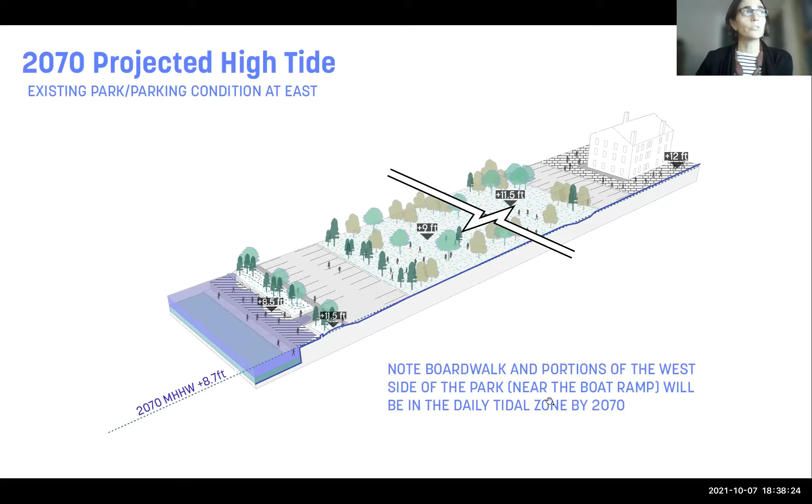In the future, with predicted sea level rise, we've looked at several models and have a consultant on our team, VHB, who's been helping us understand the best models for sea level rise to use. The future predicted high tide, again happening twice daily, in 2070 is at 8.7 feet. You can see that will inundate the boardwalk itself and portions of the access to the boardwalk on the east side. Not shown here, on the west side of the park near the boat ramp, there are areas of the actual landmass that would also be in that daily tidal zone by 2070. You can see in this map that same condition on the existing site, showing that by 2070 there would be some areas of flooding on the west side of the park.

Certainly all of the areas right along the shoreline at the boardwalk would be in the tidal zone, with more areas in the tidal zone by 2080, 2090, and 2100.

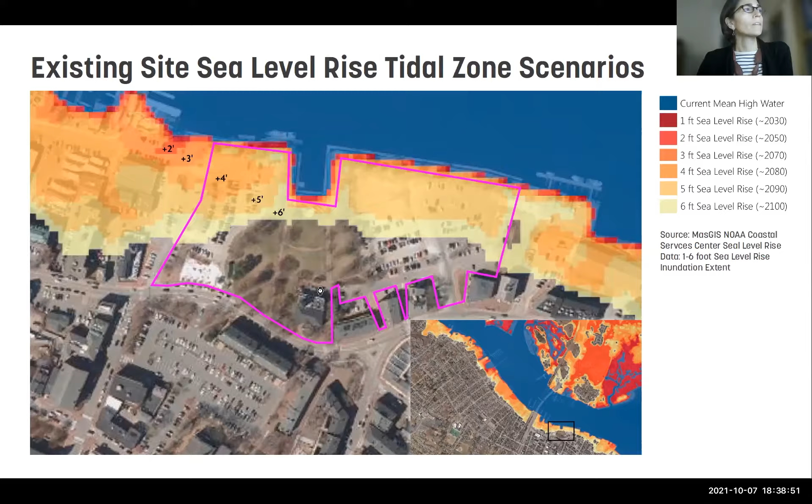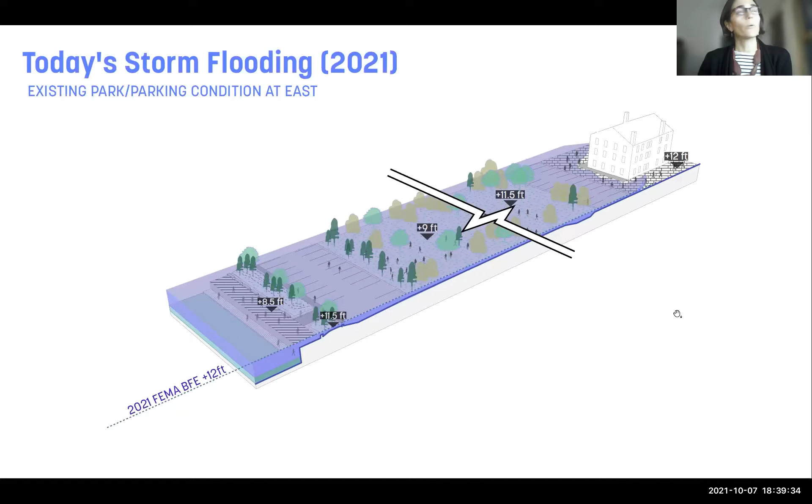The second piece of the picture when it comes to sea level rise and living in a coastal community is storms. This is showing the flooding extent for the 100-year storm, meaning there's a 1% chance of that storm happening every year. You can see that elevation set by FEMA for flooding is at 12 feet. So already today on the east side of the park area, you have flooding on the order of 4 feet or so at the lower elevations, extending back towards the street at lower depths of flooding.

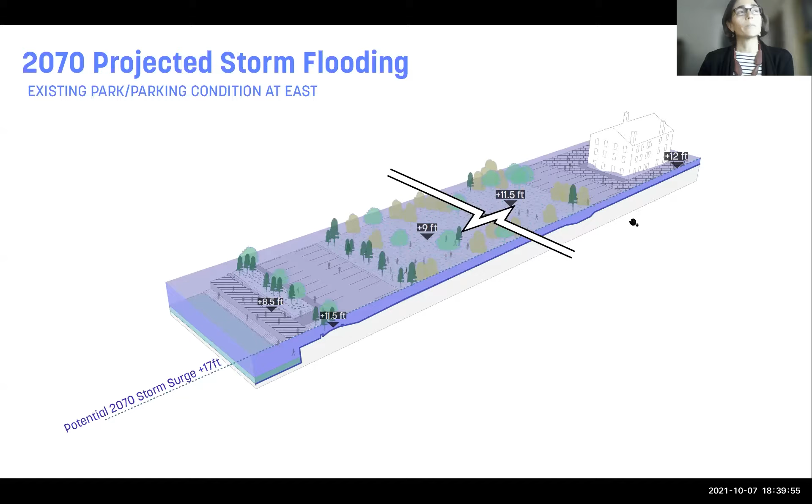The condition as you go towards 2070 with sea level rise, that projected storm surge gets up to about 17 feet, which puts that whole land mass under more like 5 and above levels of flooding. So quite a bit of flooding already predicted to happen on the site.

This map here puts that into context on the existing site. What it's mapping is in 2070, during the 100-year storm, the depth of water expected across this site. You can see it's quite deep closer to the lower parts of the site, which are currently the boardwalk, and closer down to the water's edge, up to about 10 feet of water. That inundation comes all the way in, past the street in some places.

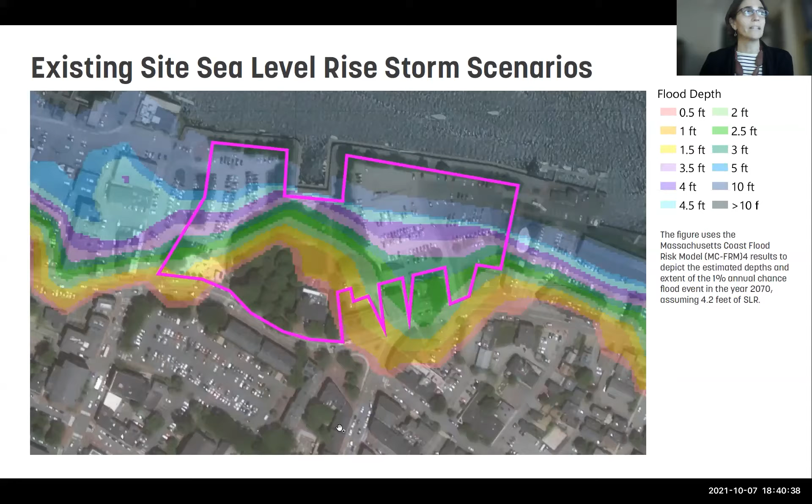These are models that are already available, widely circulated, and definitely trusted when it comes to coastal resilience planning throughout Massachusetts and beyond. What we've done is applied those to the design of the site. So this again is that site design. What we're going to do now is walk you through a series of diagrams showing, if nothing else is done and the park itself is the only thing implemented from a design perspective, how that same kind of tidal inundation and flooding from storms would affect the park itself. Then we can talk about future improvements as well.

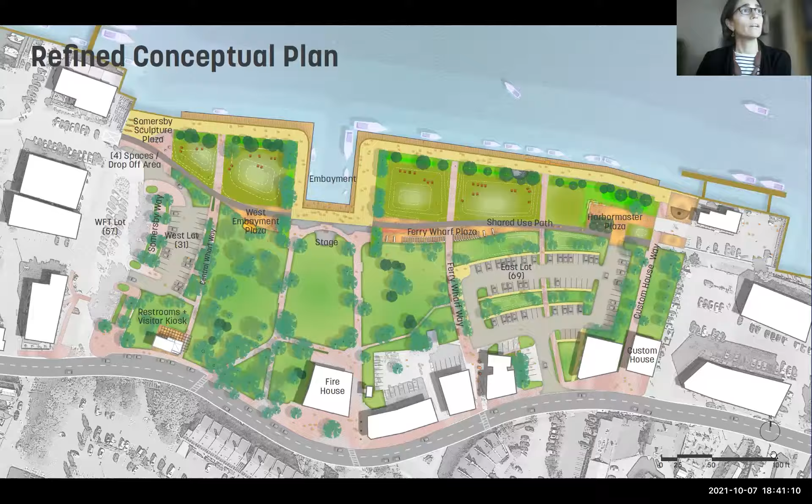So what this diagram is showing is the park design with the designed grading plan, which has a couple of limits. It does have to tie into existing site conditions at the existing Market Landing Park, as well as all along the boardwalk condition and at the edges of the site. So there are some limits in terms of how much we can raise the grade of the site because of the surrounding conditions we're stitching to.

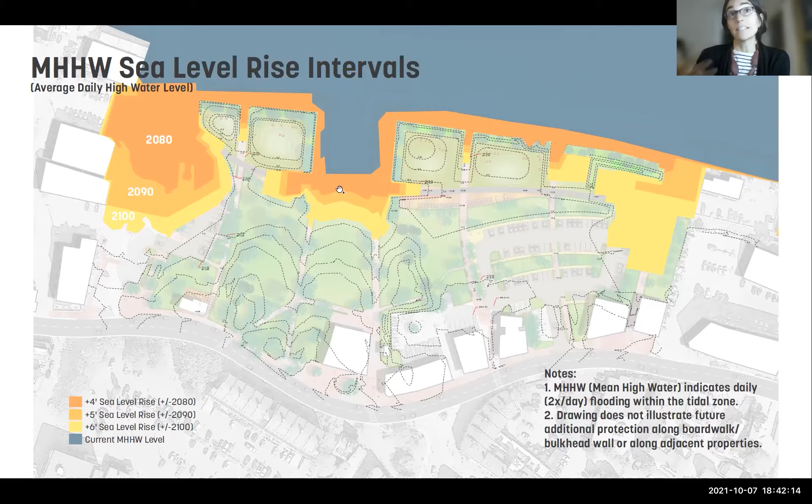What this is showing is the average daily high water level. Twice daily there's a high tide. This is showing that average high tide in 2080, 2090, and 2100. You can see that there is some flooding of the site that starts to occur between 2070 and 2080 because of sea level rise. Again, this is twice daily flooding that is expected if no other measures are taken, if you only implement the park design and nothing else. These are the areas that you could expect to start seeing daily wetting, they're essentially in the tidal zone, so they're getting wet twice a day.

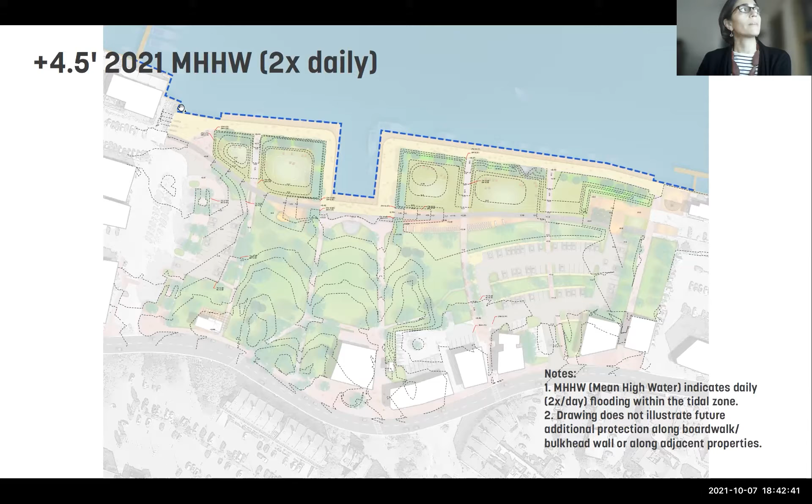And what this does is back off of that and explain a little bit about what time horizons you can start to expect things to get wet, which I think is a useful way to think about it. So this is showing today's daily high tide, twice daily, water gets to that elevation of 4.5 feet. And currently that's really held back. There's a little bit of where it comes in at the boat ramp, but otherwise it's held at the edge of that bulkhead wall.

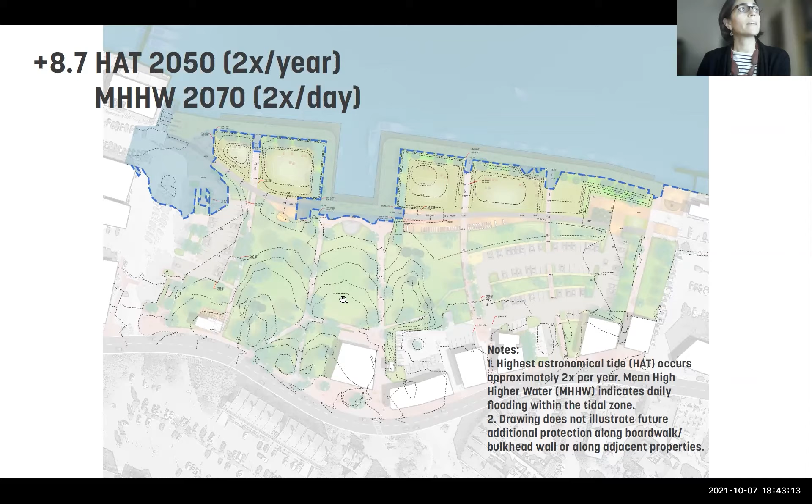In 2050, the highest astronomical tide, HAT, which occurs about twice a year, would bring water to this contour, 8.7. And then also by 2070, that same area is getting wet twice daily as part of the average high tide. Again, this drawing doesn't illustrate any additional improvements except changes to the park and the grading of the park.

By 2070, twice a year, the highest astronomical tide is going to bring tidal floodwaters into a greater extent of the park, and you can see the ways in which that's happening. Again, no other changes are happening here in this scenario to the boardwalk or to the areas in which the park really has to stitch into that existing condition.

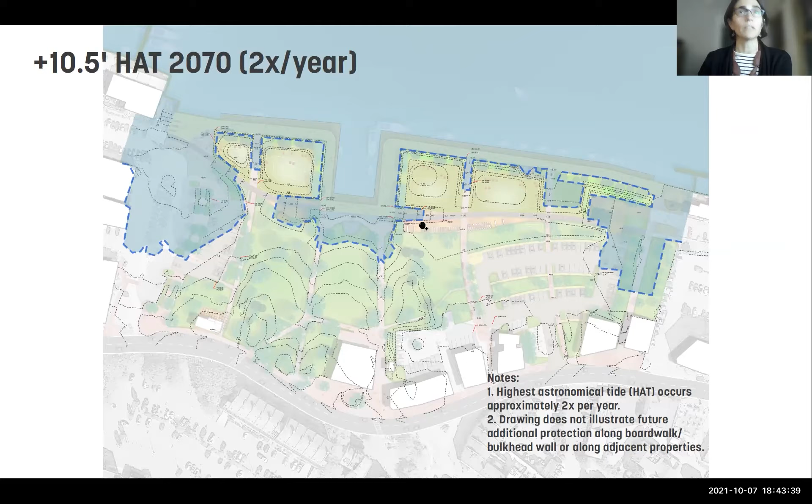And then finally, we just wanted to map that 1% chance every year of a 100-year storm. So those base flood elevations are set at... this number is wrong, excuse me for that. So that FEMA base flood elevation at elevation 17 in 2070 would be inundating a really significant portion of the site. But again, that's the 100-year storm, so 1% chance every year of that happening.

And this is again illustrating the amount of flooding if no other protective measures happen in adjacent properties or along the water's edge.

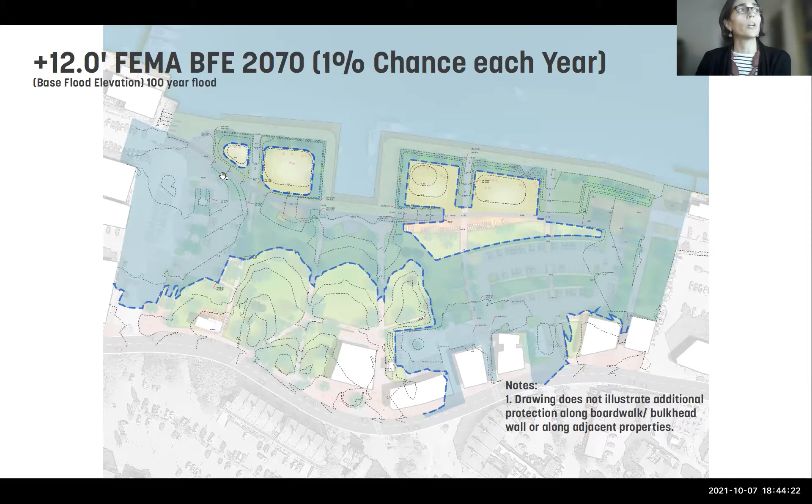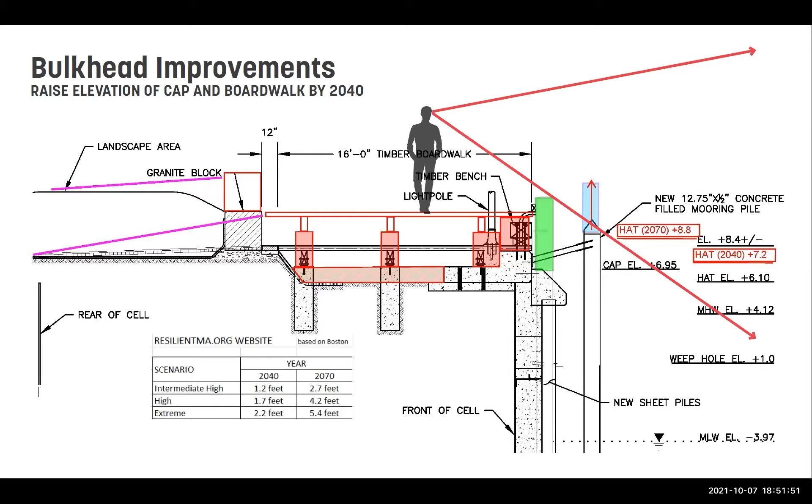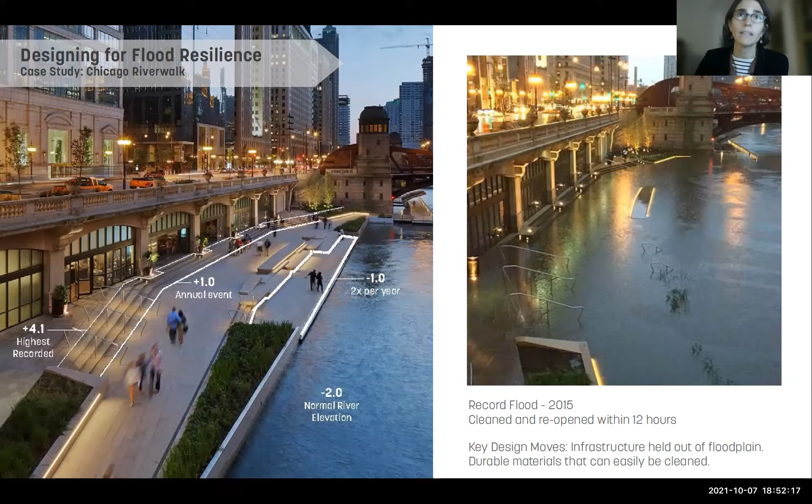Last but not least, we wanted to acknowledge that especially during a storm scenario, we showed some pretty significant inundation of the park itself. Remember, that storm scenario is really a 1% chance every year, so roughly 1 in 100 years that could occur. But we're pretty familiar with planning parks to be occasionally inundated, and there are some tried and true methods to ensure a park can get wet and be resilient to that flood condition, emerging in the same condition it went into the flood.

We have two examples here. The Chicago Riverwalk, a Sasaki project that transformed Chicago's relationship with the river, was designed to flood. The Chicago River floods about twice a year, and all the areas along the Riverwalk are designed to meet that inundation and handle it. It keeps infrastructure out of the floodplain and uses durable materials that can easily be cleaned. These pictures show a record flood in 2015, and the whole park was cleaned and reopened within about 12 hours. It's a pretty simple operation when you plan well for it, and the park can be resilient to it.

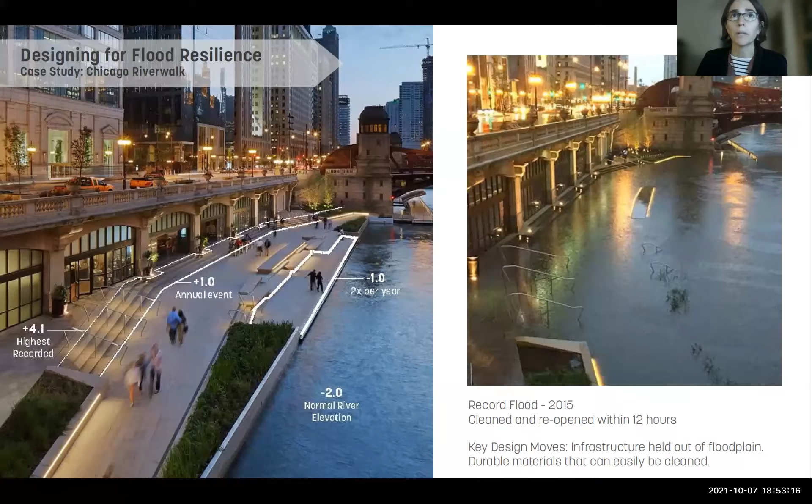The second park we wanted to note, also designed to flood, is Cincinnati's Smale Riverfront Park. The nice thing about this, in the context of Market Landing Park, is that it's a much softer park than Chicago, so the balance of green areas to paved areas and program space is similar in lots of ways. This park was also designed to flood. This is the record flood, a 100-year storm that flooded the Ohio River. The park was inundated for several days, which is unlikely to ever happen at Market Landing Park, where flood scenarios are more like a couple of hours of high tide, maybe enduring a couple of high tide cycles in a big storm. But this park was underwater for several days.

There were significant measures taken in the design process to ensure that infrastructure was out of the floodplain, the materials were durable, and in some cases barriers were installed on the upriver side to prevent any flotsam from taking out structures. When the Ohio River floods, all kinds of things like old refrigerators and cars come floating down the river. That isn't the case in Newburyport, but we want to acknowledge that parks can be designed to withstand this kind of flooding.

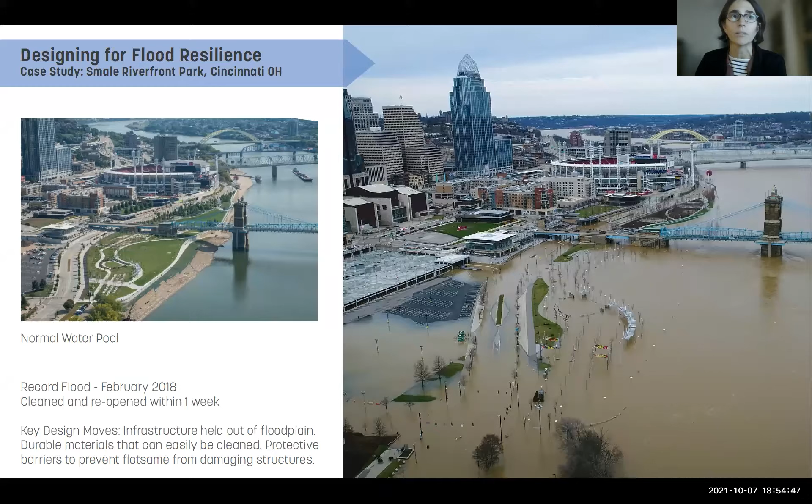There are specific considerations we can make to ensure that Market Landing Park can be resilient when floodwaters inundate the park in the future.

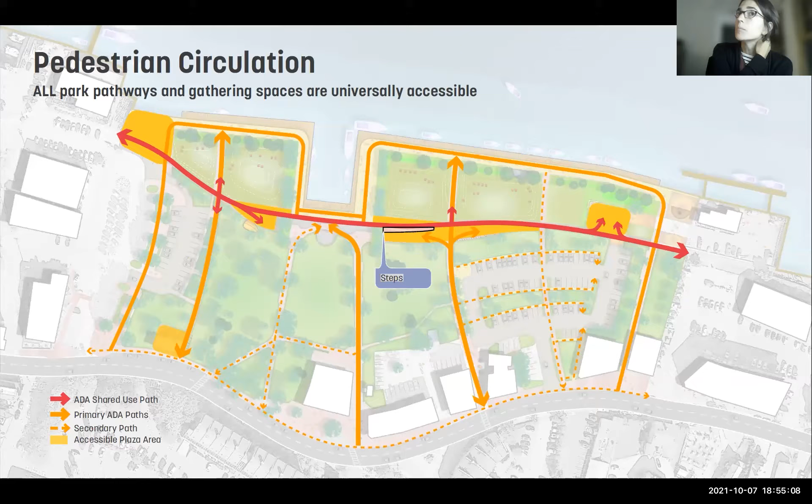We have a couple of diagrams here also to answer questions about service and commercial fishing and ADA access that came up at our last meeting, so we want to make sure we're all on the same page with understanding some of these key moves made in the design and planning of the park.

There were several questions last time about ADA access and ensuring the park could be universally accessible. We want to be clear that's a core tenet of our design, to ensure all park pathways and gathering spaces are universally accessible. Whether you're using a wheelchair, pushing a stroller, or riding a bike, you can get there the same way as any able-bodied person on feet.

All of the bold lines here, as well as all of the dashed lines, show universally accessible pathways. These are pathways that are either flat or sloped at a level that doesn't even require ramps or railings, so these are just universally accessible ways to arrive at the park.

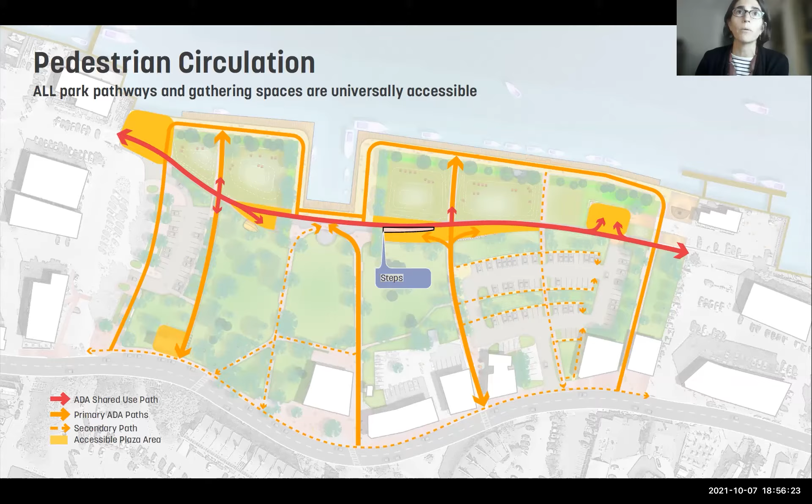You can see that all of the gathering spaces, shown in yellow, are accessible by those pathways. There is one area with steps in order to retain some of the grade as the shared use path drops down to meet the existing grade at the boardwalk, but both the upper and lower levels would be accessible, so there could be companion seating and opportunities to enjoy both experiences, no matter your level of mobility.

The second thing we wanted to note here was the everyday vehicular circulation. You can see those two access points from the street and the ways in which cars can move fluidly around to find parking spaces and then move back out of the site, and the ways those would be accessed by those pathways we just showed you.

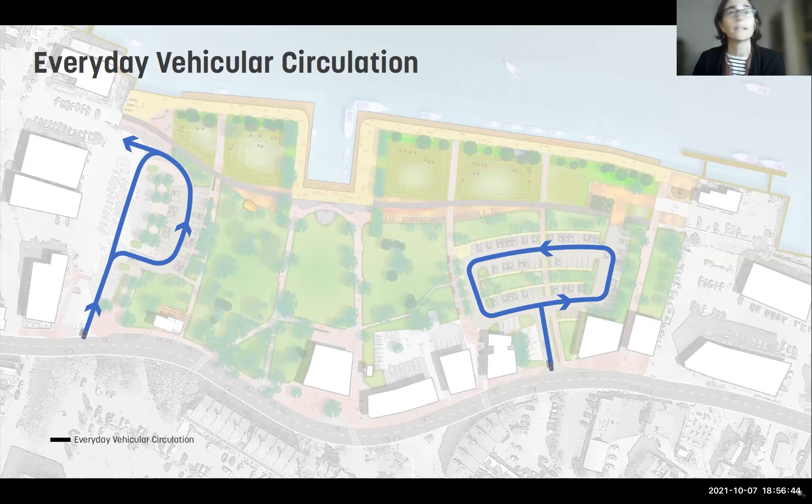There were several questions last time about circulation and access specifically for the Harbor Master facility. We understand there's a fuel truck, one of the largest vehicles that comes in regularly, and this pathway shows the outer extents. The bold lines are the outer extents of a fuel truck that would be able to turn and drive through there, so we're studying the way in which that wheel pathway, as well as the outer extents of the truck, could be accommodated along a paved route for that turnaround and backing into the Harbor Master facility. Smaller trucks could use the same access route and make those turns even more efficiently.

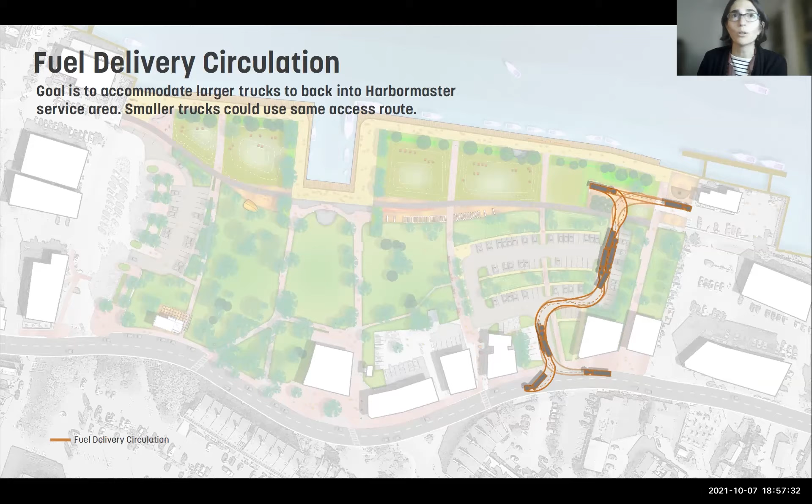We also wanted to note that fire truck circulation has been well coordinated with the fire chief. What we're providing here is a route for fire trucks to get to the embayment where they need to be in order to fight fires that may occur on any boats at the dock.

We've provided that access via the shared use path as well as routes through the parking area. The solid outer line depicts the outermost edges of a vehicle as it's maneuvering through that space, and you can see we're making every effort to ensure that outer vehicle movement remains on a paved area, which can accommodate it and be resilient to that vehicular load over the long term.

It's also worth noting that the embayment is used as the winter area for certain commercial boating activities. So for specific loading and unloading of that use, we could also imagine that specific parking and loading access could occur on these same vehicular routes that the fire truck is using.

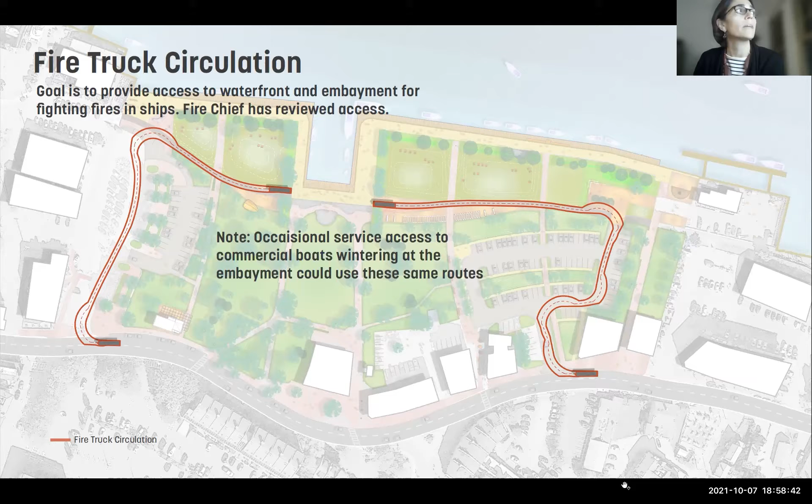There were a few questions last time, as well as in the comments, about the width of that shared use path and how it functions specifically for vehicular access and fire truck and emergency access. So here we're noting on that same rendering you saw last time that there's a 10-foot wide paved width, which is appropriate for a fire truck as well as everyday use of the shared use pathway. Then there's a 2-foot shoulder.

In some cases, that shoulder would be paved and rated for vehicular loading, and in some cases, that shoulder is reinforced turf. So again, it provides the resilience to the occasional loading of a fire truck and other wheeled vehicles, but it also can appear grassy and feel soft and park-like on a daily basis.

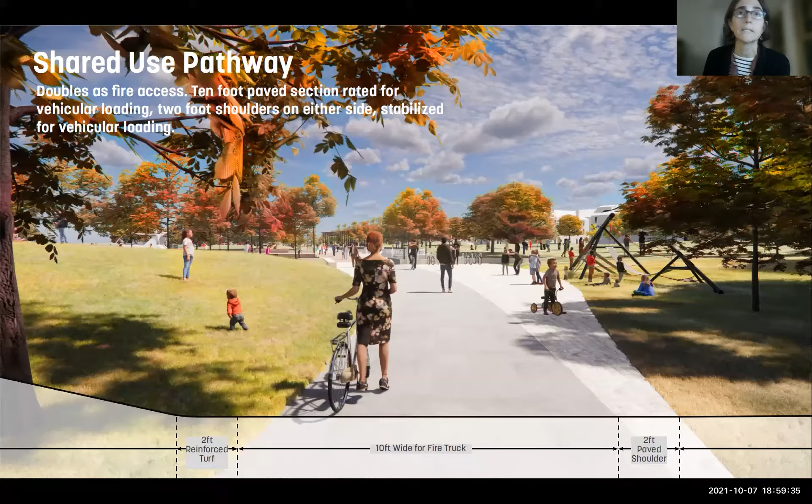Finally, we wanted to note that there were a few additional topics. So those were the two big ones we heard from you all about, as well as saw in some of the comments that came through, but there were some additional topics. We just wanted to make sure that we all had understood and addressed all of the comments that had come through about the plan.

We received 24 specific comments through the online portal in response to the refined plan. I think it's worth noting that at this point in the process, it's typical to see people who are very passionate on one side or the other respond, while most of the public who had been active earlier start to fall away. So again, about 50% of those comments are positive, cheering on the design, or neutral, and about 50% are specifically focused on a couple of questions or critiques about elements of the design.

There were four themes that came out, especially in some of those comments critiquing the design, that we want to be sure we really address. In the top left here, there were a number of comments about additional bike racks. We wanted to note that these can absolutely be accommodated within the design of the park, and we'll continue to study the best locations and numbers of those as we get into the construction document phase. Thank you for those comments.

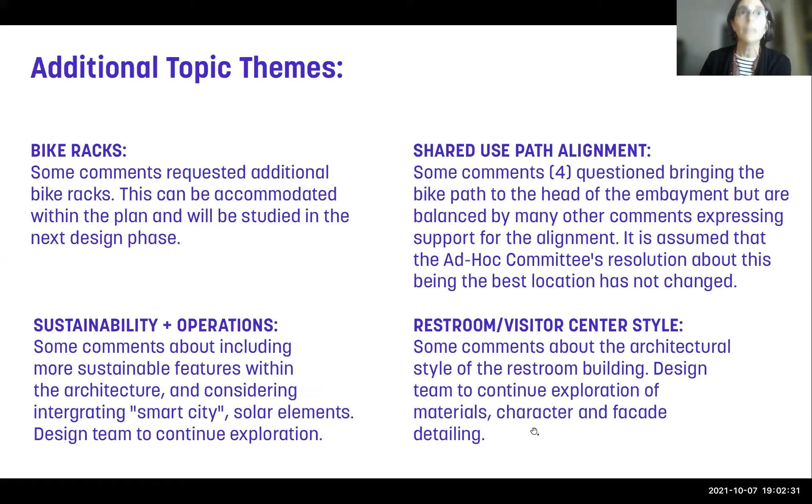Finally, there were a number of comments about sustainability and operations, and also some comments about the restroom and visitor center style. We will continue to address those and explore different options during the design development and construction documents phase, and feel confident that we can hear the comments and incorporate those into the design.

Finally, there was one additional question raised at the last meeting about additional maintenance costs, which could be expected related to the acquisition and operation of a new park within the Newburyport Park system. So we're offering three ways to think about this. The first, on the left, is local precedent.

The Waterfront Trust has reported a range of operating costs over the last bunch of years, everything from about $30,000 a year to about $85,000 a year. The area of the existing waterfront park and the new expansion of that are roughly the same, so one can imagine that the costs would be pretty similar to what the Waterfront Trust is already paying.

Another way to look at this is that Sasaki works with park systems all over the country, and we occasionally work with operations and management consultants. So we've borrowed a few numbers of typical park maintenance costs from other projects and applied those here.

You can see we have a park maintenance cost for lawn per acre, for hardscape per acre, and for ornamental planting beds. These are the primary features of the new park in Newburyport. When we apply those numbers to the quantities of different landscape types in the park design as it currently stands, we get about $30,000 a year in maintenance costs. That's at the low end of what the Waterfront Trust is reporting paying, but certainly something to consider as part of your operational budgets moving forward.

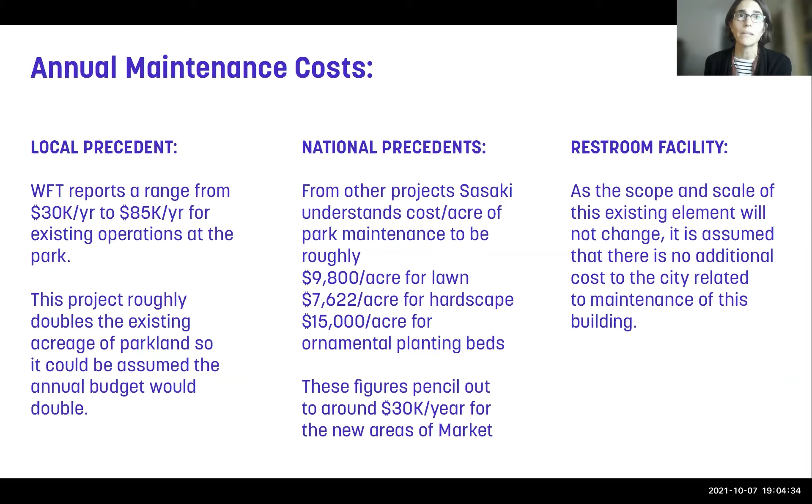The Waterfront Trust has confirmed that they support the plan. There are a few comments they had added. The Harbor Commission, same thing. When I spoke to Paul Hogg, the harbor master, he indicated that they do want to take a look at the dimensions where the crane is, but they're very confident that's just a minor question of making sure the exact dimensions are right. But they have every confidence in the project as it's been designed, and they don't have issues with access, if you will.

With that, I think what we're hoping for is that the committee here can confirm that Sasaki has done a good job on the schematic design that we've all been looking to bring together, so that they can then go ahead and do detailed design plans suitable for construction.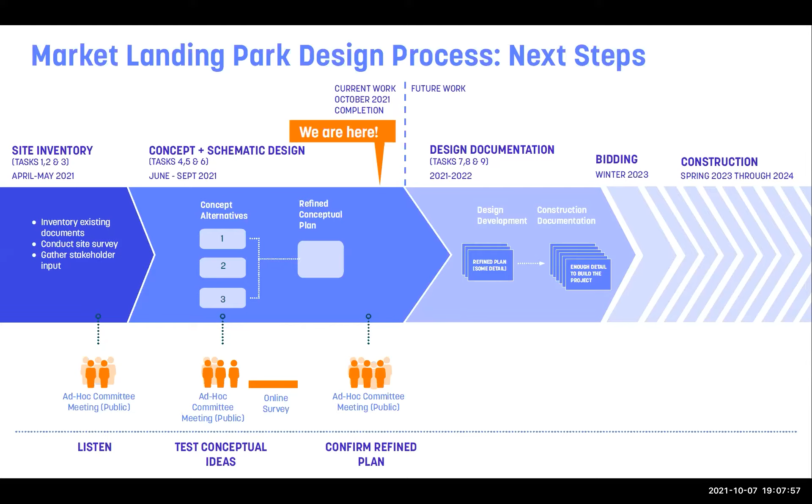Yes, thank you. I see the mayor has joined us. Mayor, did you want to say something? We're going to bring it back after public comment. Thank you, I appreciate that. I apologize, I had a different time for this meeting on my calendar, so I apologize for jumping in late.

A couple things. In terms of where the dumpster is now for Sea Level Restaurant, that was a concern raised by the restaurant owner, and obviously that's a really important function for the restaurant. I've also had numerous concerns about trucks coming down, if you're facing Sea Level on the right there, which would be Ferry Wharf. It's not marked. Next to the firehouse, that path there, that is where oftentimes cars will come in inappropriately.

Or they've been having deliveries come in and taking out the street signal there. So I would ask that there would be a way for deliveries, if possible, to come in by the dumpster. There's a brick path there now. Could that be opened up so that it could be a way for them to get deliveries in, as opposed to the system they're using now? I just think it makes a lot more sense to direct truck traffic, and for settings for this firehouse stage, they could all come in versus by the dumpster, that dirt lot. I just would like you to think about that.

Mayor, if I could, we actually discussed this earlier today, and there's agreement that we can adjust the trail there to provide better access to the dumpster location, which is being maintained. There are some mature trees there and a bit of a grading change that might preclude us making a full width path, like elsewhere in the park. So what we're trying to do is make sure they still have the access they do to the dumpster area, possibly more convenient than they do today. It wasn't entirely clear that we'd be able to get vehicles through there, which I think was one of the questions to the building, but rather we can.

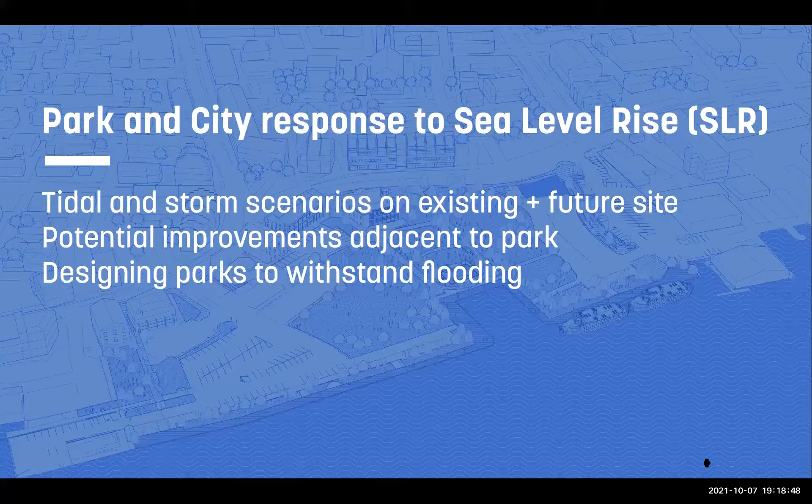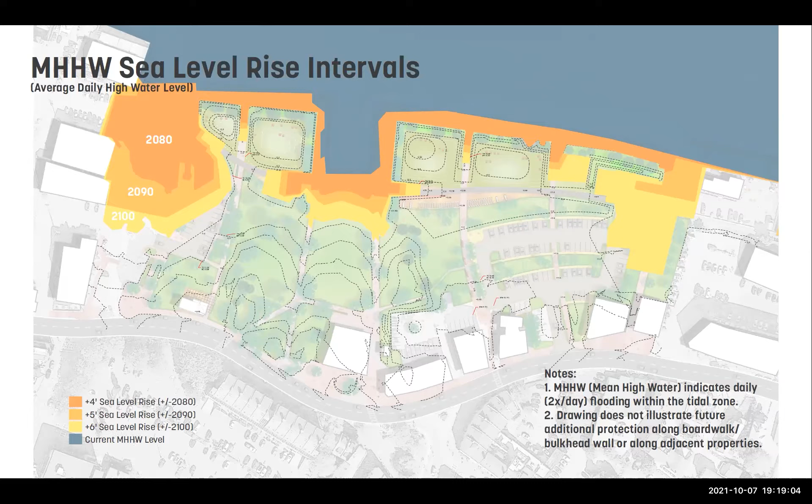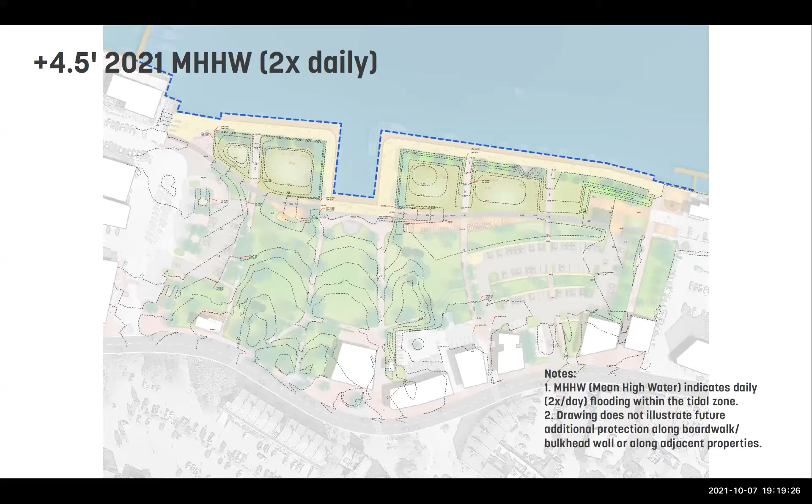The proposed cap that's there now is your standard proposed cap for the fiberglass sheet pile. Raising that to the top of the timber bench, where that silhouette person is sitting, provides a lot of benefit. It's just a little different design than the rectangular concrete filler material that Andy had shown, which came from the engineer.

So all I'm saying is that another option the engineer has is raising that cap about 2.5 feet, so the top of the cap is where the top of the seat is, the top of the timber bench. To resolve that, in my opinion, is quite easy. We can put up a new pipe rail so they can still sit on that; their feet will extend a little further. That's okay. Maybe we put a pipe rail on the cap.

Those are things that I want the Waterfront Trust to not deter from the practicality of — we need to move forward as much as we can on resiliency now, because we're going to spend a lot of money citywide on resiliency. Not doing this because of someone not being able to sit is, in my opinion, not the way to go. I'm not saying the Waterfront Trust is saying that's the way to go, but I'd like to take that completely off the table because there are ways around that. I just want to throw that out there. I think that's very important.

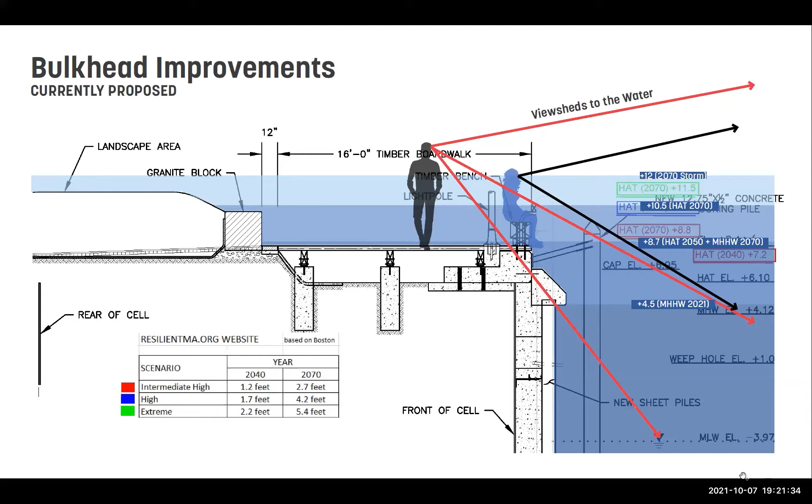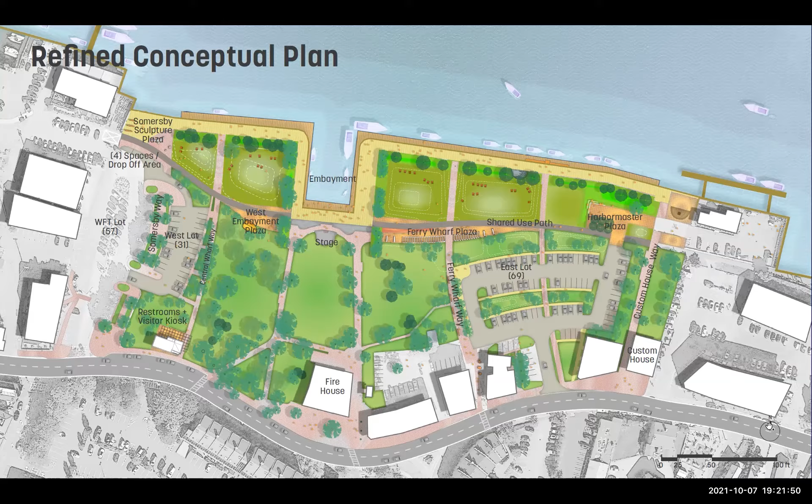And Andy, you didn't happen to take my sketch to present at this meeting? I do have a copy of that, I can pull it up. This will just take a minute, Councilor Eigenman. All it is, is replacing the four parallel parking spaces with seven head-in parking spots. It doesn't really change much from the layout, and it doesn't change hardly anything for the access to the waterfront parking on the west lot.

Generally, I'd like to get people's opinion, but a lot of people go there and park head-in, sit there for lunch — it's a kind of popular spot. It's easy, you drive in. Right now there's four spots, and a lot of us park where you aren't supposed to park, in front of the boat ramp, because you're only sitting there temporarily. So I kind of like this. I was curious what people on the committee think of this.

This is Andy, if I could. One of the balancing points raised in relation to this was the distance between the cars and the shared use path — the idea of having cars coming and going quite frequently from that space and potentially having their bumpers go over the curb line. We do have a guardrail over at Michael's along the shared use path, but that's not obviously the preferred landscaping next to a path or buffer. There is the ability to potentially fit these cars in there, but there was a concern about that.

And then there's the ability for folks — I'll defer to the Waterfront Trust, parking clerk, or others who may want to weigh in — but there has been, at least to my understanding, some concern that we maintain at least a few spaces associated with the park, even as expanded, since we removed some spaces where folks could nose in towards the water's edge. We're trying to balance some issues here in this very tight space, where we can't go any further than the ramp down to the water, which is right down in here.

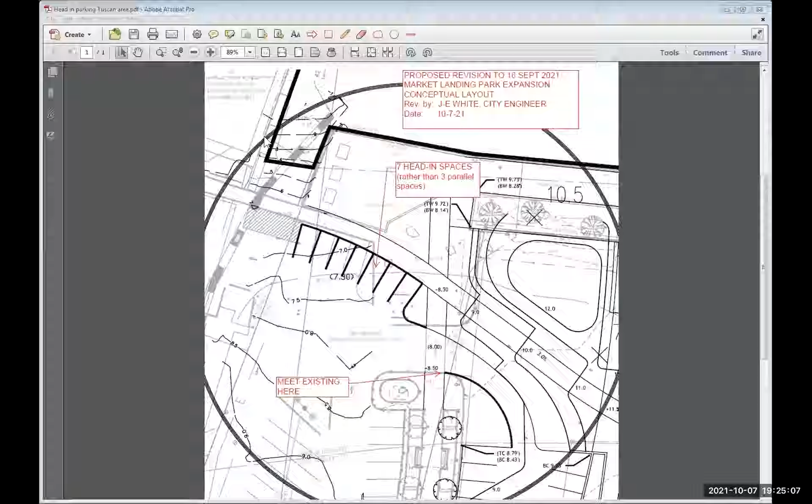I don't want to belabor this any longer, but I do throw that out there for people to consider. John Eric, your point is well taken, and I think all the points Andy is making are also well taken. I believe this is something we can solve in the construction documents phase, understanding there is some need for parking and a desire for at least some of that to be head-in, but also that there be a buffer to allow safe passage of pedestrians and cyclists along the shared use path. I believe we can find a balance with some design study, and continue to work through this together in design development and construction documents phase. Well, thank you very much.

My final comment about the grading is, if we do succeed in raising the cap of the bulkhead, and whether or not we get a ton of money completely out of anyone's expectation, any redesign to Sasaki's project right now, any redesign to raise a boardwalk a couple feet for all these walkways, it's easily accomplishable because of the way they have it designed. The sides of the shared use path right now are all earth-filled areas. So any changes to the bulkhead or boardwalk, if we get lucky with a lot of money, I would deal with Sasaki's changes later.

I just throw that out. It should never be a showstopper that if we can raise the boardwalk now for some miraculous reason that we have money, that we don't stop Sasaki. We just give a change order to raise it a couple feet. It's not a big deal.

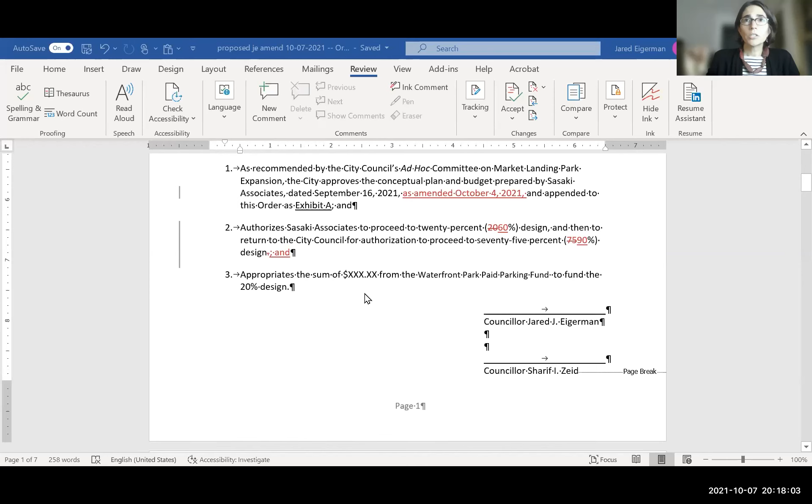Counselor, are those submissions binding once this team votes on them? No, the submission percentages are not binding. This is a recommendation. The city council is the only body that can lock this in. And we're not there yet, we've got 6 other counselors to talk to.

I understood, and Councilor Zeid, who's a co-sponsor with me on this, has already said we could change it to 75 and 100. So we may end up doing that. I think it's going to be helpful to give you more time to sharpen your pencil and tell us how much more money it's going to cost for 75%. And then we can also talk about including or excluding the building. All of those things will be handled on the floor of the full council. We have time.

Councilor Zeid: I just wanted to ask a follow-up. Our next meeting is next Tuesday - I can't imagine that's soon enough. So we're planning to vote on this to bring it out on October 25th. Is that a sensible expectation? I think so. I want to give Kate enough time, and Ethan Manning enough time, because I don't want to go much past that. We're going to hit Thanksgiving, Christmas, session is over, and change of administration, council changes. You follow me?

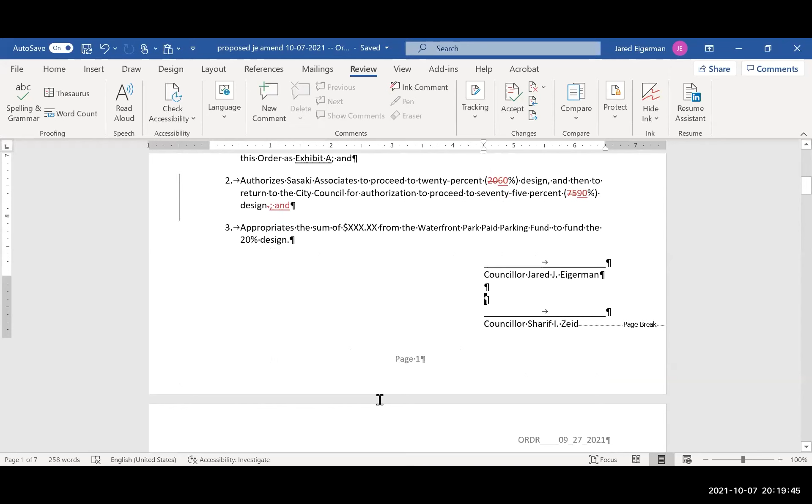Thank you very much, John Eric White. Real quick, I just want to make sure the councilors are aware that I've been doing construction projects, put out to bid, for 3 decades plus.

When Kate puts together a proposal, I'm supporting whatever she puts together. I'm just throwing it out there that we all need to be aware that a lot of times the funding is not in sync with the percent deliverable. So 60% design does not mean you spent 60% of the budget. The joke we have internally with engineers is, 50% of the design budget is going from 90 to 100% design. I don't know if that makes sense to many of you. Yeah, it does, John.

That's the reality, and that's why it's been vital to have you on this, and also why we have Kim Turner, the chair of our Parks Commission. Absolutely, we hear you. It's just, we're not going to be able to solve it tonight.

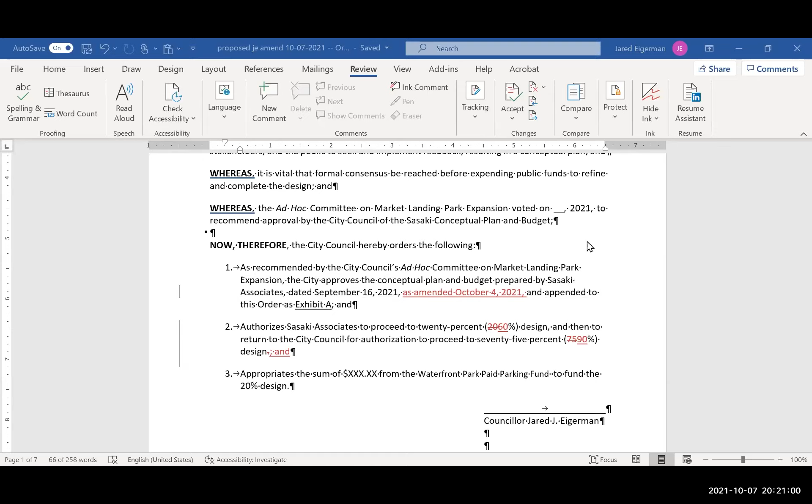Anyone else before we vote? Just on that document, Jared, I think you also need to fix the words. You fixed the numbers, but the words written next to them are not correct - just a Scrivener's thing. You changed it to 60%, but to the left of it, it says in words 20%. So just make the words and the numbers the same.

Right, okay, I got it. I just changed it. And I'm going to change the URL - I don't have it yet, but I will. So I'll change the URL. Okay, I'm going to do roll call.

On the motion: Counselor Zeid, yes. Counselor Shand, yes. Counselor McCauley, yes. And I'm a yes. All right, great.

I really want to thank everyone. This is exciting, make no mistake, but also I want to say, I believe that this committee, both voting members and non-voting members, have a high degree of confidence in the work of Sasaki Associates. And that has really made a difference. I just want to say that on the record.

How about a motion to adjourn? So moved. Hold on - we voted on the amendment, don't we have to vote on the order to bring it out? Oh, well I thought it was a friendly amendment, but that's okay, we can do that. That's fine. No, I don't want there to be any ambiguity in the record.